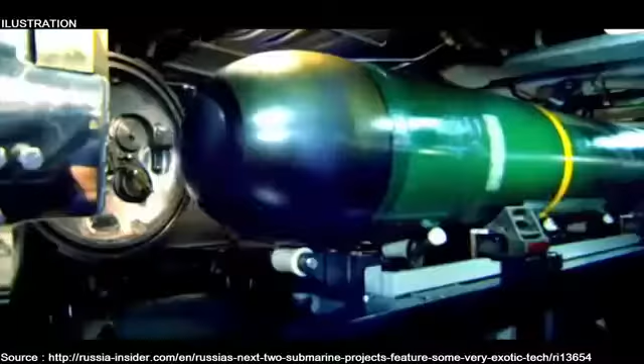Russia expects to complete detailed design work on its next-generation Project Husky class submarine within two years. That's what United Shipbuilding Corporation officials told the Moscow-based TASS news agency earlier this week. However, the TASS report did not cite its source by name or offer a direct quote.

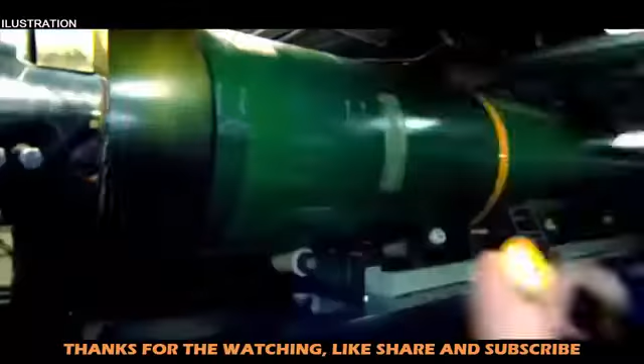Nonetheless, some details have emerged about the projected Husky-class follow-on to the Project 885 and Yasen-class boats. The new boats will come in two versions, developed by the Malachite Design Bureau, based on a common hull design. The primary difference will be in the two vessels' weapon systems.

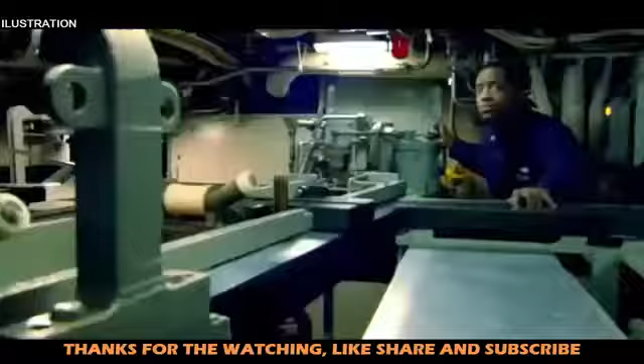The Interceptor variant will not feature tubes to carry long-range anti-ship or cruise missiles. That version is expected to replace the Project 971 Akula, the Project 945 Sierra, and the remaining Project 671RTMK Shchuka-class Victor III boats. The SSGN variant will replace the Project 949A Antey-class and will also be armed with hypersonic Zircon cruise missiles.

The Russians are using the Project 885M Yasen class as a starting point, but the new submarines will be smaller and cheaper than their Soviet-designed predecessors. There are indications that Moscow will be extensively leveraging automation technologies developed for the Project 705 Lira-class attack submarine, better known in the West as the Alfa class.

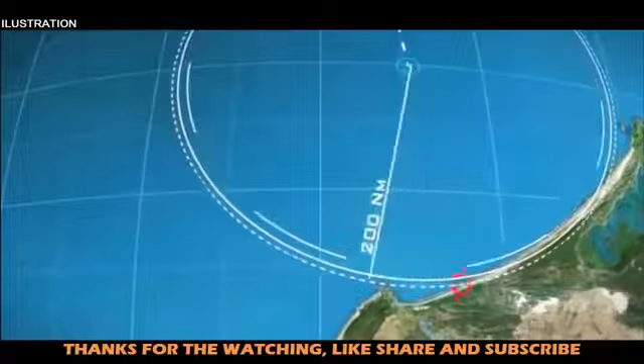Russian analysts estimate the next-generation submarines will displace no more than about 6,000 tons, meaning another Soviet innovation might make a comeback: liquid metal-cooled reactors. The Lira and several other Soviet designs used lead-bismuth-cooled reactors, which produce much more power and are more compact than pressurized water reactors. However, the disadvantage is that liquid metal-cooled reactors cannot be shut down and require specialized port facilities.

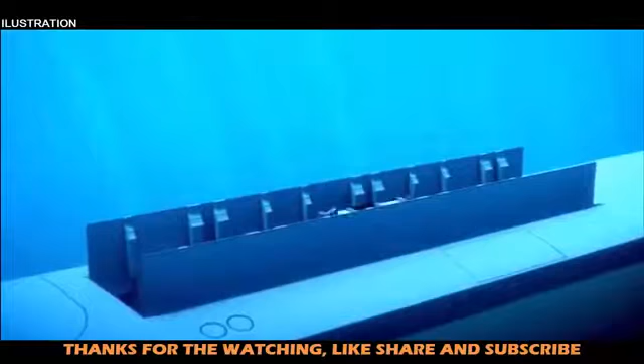Russia will also incorporate composite structures in its next-generation follow-on to the Project 885M Yasen class in the 2020s. These materials may be used to drastically reduce acoustic signatures. While the United States has used composites to reduce weight, complexity, and cost of parts for its Virginia-class submarine, Russian efforts are far more ambitious. This wouldn't be the first time Moscow has experimented with novel materials—before its collapse, the Soviet Union pioneered titanium hulls to increase the hydrodynamic performance of its boats.

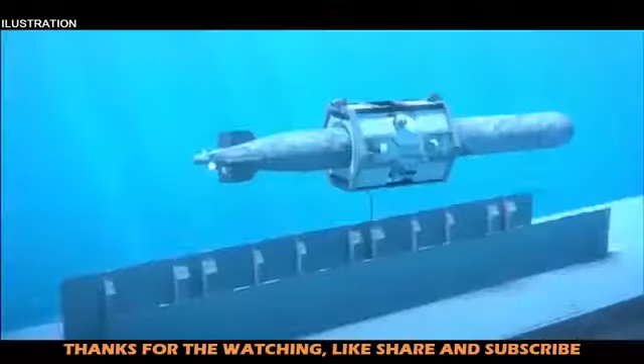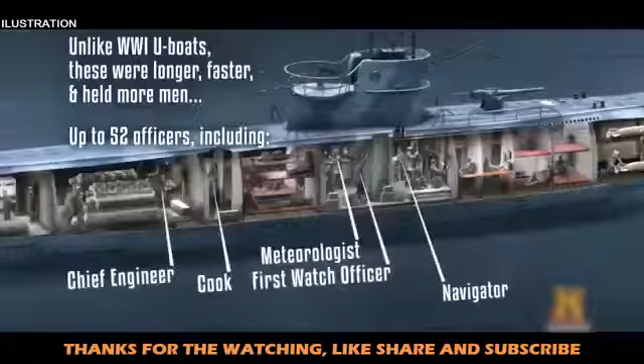These are new multi-layer composite materials. Their structure and composition reduce the sonar signals reflected from a submarine, isolate working mechanisms from vibrations, and so on, said Valery Polovinkin, an advisor to the general director of the Krylov State Research Center. In an interview with the Russian-language daily Izvestia, he said the opponent will not get the required level of signal reflected from the submarine, as the composite material has a high internal loss factor. Sound absorption properties can change when vibration occurs, completely preventing the spread of vibrational energy.

The Russians hope to use composite materials for everything from the hull coating to the dive planes, rudders, stabilizers, propellers or pump-jet propulsors, drive shafts, and possibly even the hulls themselves. If the technology works, composite materials would greatly reduce the weight of various structures, increase the boat's reliability, and reduce operating costs—since composites don't corrode and wouldn't need to be painted, Polovinkin said, reducing maintenance costs. Moreover, composite structures should simplify manufacturing by reducing part counts.

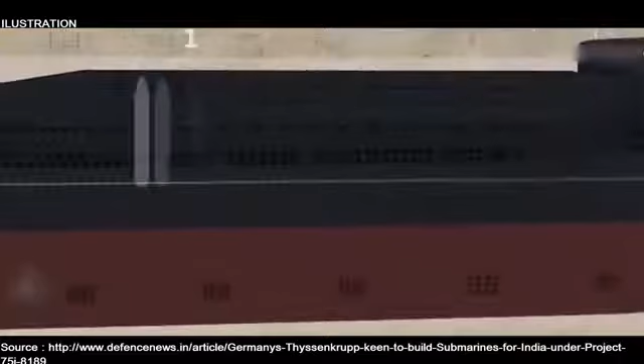The new composite materials are still in testing, but Russia will test its first composite propeller design in 2018. This is one of our institute's most promising projects, Polovinkin said. This trend reduces vibration in the blades and increases the efficiency of the screw. These various effects will help improve the ship's acoustic signature.

The question, as always with Moscow's ambitious new projects, is how Moscow hopes to pay for them, even if Russia has the technical wherewithal to develop the technologies.